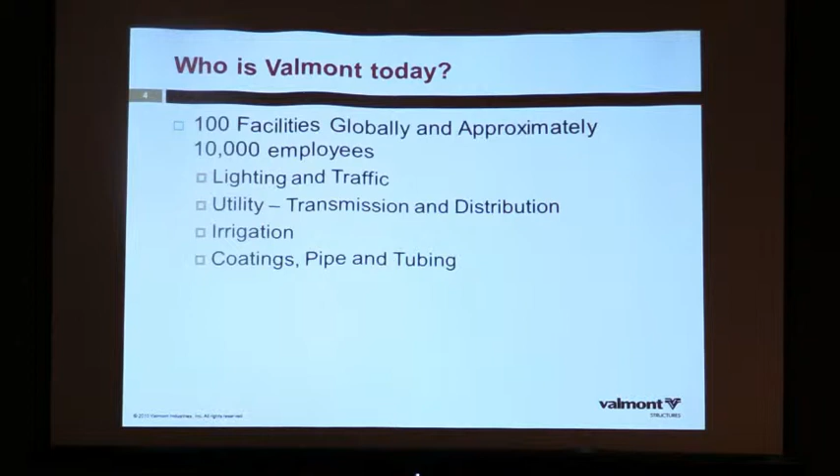Just a little bit about Zach and Steve's team. I'll introduce them specifically in a moment, but Valmont thinks of ourselves as a company of engineers. Whether it's in the lighting and traffic space, our application engineering, research and development, product development, or our machine builders business, we are engineers in every facet of the business. We're probably not as heavy per capita in engineers as you are in your businesses, but relative to our competitors, Valmont certainly is a leader with engineering aptitude.

A little bit of introduction about the two guys who will spend the most time talking today. Zach Thiemann, first of all, is a professional engineer. He manages the United States application engineering team. One of the guys who works for him is Steve. He's also got Barry Slottick, who you guys have worked with in the past, and Nizam Qasim, who handles another part of the territory. A little about Zach: he graduated from the University of Nebraska at Lincoln, did his postgraduate work at Iowa State, and is continuing his education today. He's been with Valmont 5 years in a number of different roles, always in a leadership capacity. Zach spent a lot of time in R&D where he led our FHWA breakaway, decorative base, and breakaway applications, doing a wonderful job with that several years ago. He spent some time in our communications businesses, monopoles, lattice towers and the like, and then most recently back in the lighting and traffic business.

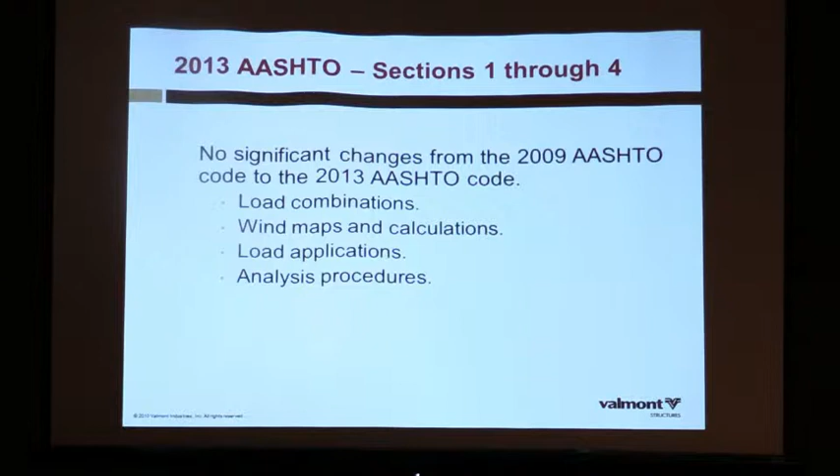We get right into section 5. Some of the background on AASHTO 2013, what I've learned reading through it and talking with others, is it was very much a research-based code. A lot of research out of Lehigh and Purdue, in regards to NCHRP reports, stuff they did in the lab, turned into stuff in the code.

So sometimes you'll see some effects from the code that might not, as designers, as people using it day to day, necessarily jive with what we see in the field.

What about the research that Karl Frank did down at Austin? Yeah, some of that went into it, but the two big reports were the two NCHRP reports, Rob Connor out of Purdue and Sougata Roy out of Lehigh. Dr. Frank was involved with that, but his wasn't as prominent. Was there some research in particular you're thinking of that got incorporated? They used his work. In particular, I know the Lehigh group used him as a consultant, and there was some back and forth, but the lead research was through Dr. Roy with Lehigh. Right, but they took his results, he did a lot of testing. Through the lab, through that NCHRP study there through Lehigh, that got incorporated into this research. Yep.

So kicking it off, one of the changes to the AASHTO code is they incorporated a minimum number of sides for tubes. Depending on your tube diameter, you had to have a minimum number of sides. Anything less than 13 inches, you had to have at least an 8-sided structure. Round is considered infinite, so it falls within any of this. What that was doing was really taking away your square poles, 6-sided poles, all the sharp bend radiuses that could have stress risers or will have stress risers and create concerns on the fatigue side. You can see they have a chart, and there's an equation in there also. So under 13 inches, 8 sides minimum. From 13 to 28, 12-sided minimum, and over 28, 16-sided minimum.

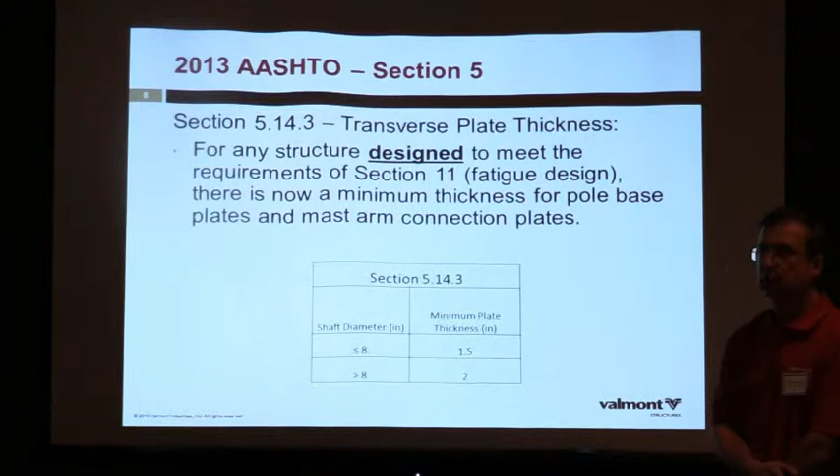So you said 5.14.2 pretty much eliminates square poles? If you're designing it to AASHTO, you're not going to be able to meet it according to how the code is laid out right now. Throughout this, if you look at the opportunities, if you've had issues or concerns, as engineers you can take an exception to something and work with it. But according to what they found in the research, they said they want to eliminate that in the AASHTO designs.

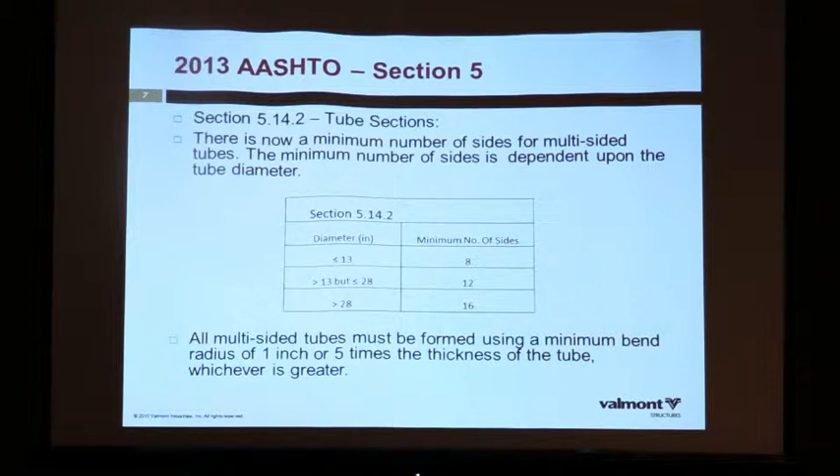Big thing I just want to reiterate again, the minimum base plate thickness is only for fatigue-designed structures. So your common light poles down the side of the roadway, 35, 40 feet tall, that doesn't require this minimum thickness because those are exempt from fatigue designs.

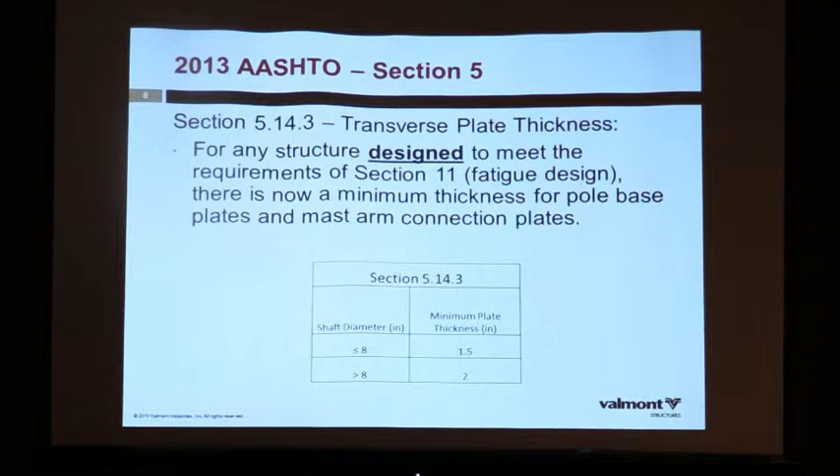Through the research, they also found that there can be issues with the welds, either a combination between welds on the top of the backup ring. Sometimes lower quality welds were placed in there because they were just using more seal welds to keep the galvanizing out. But the base plate shaft connection is your primary area for fatigue failures, so any sort of improper or lower quality weld could attract the stress in there, start creating a crack on top of the ring, and actually crack through the shaft.

So a combination of two things they did. One is they have new requirements for backing rings, when you do or don't place a weld at the top, and how you determine fatigue stresses.

The second thing they did was, depending on when you're welding it, how tall the backup ring could be. That's because of UT. When you try to UT and bounce a sound wave into the joint, if you have that weld at the top of the backup ring, sometimes the sound can go into the backup ring instead, and you won't be able to properly inspect your shaft to base plate weld. It bounces off the back of the shaft, but if it catches the weld, it goes into the backup ring. So they said if you're going to weld the backup ring, you have to do it after UT. If you're not going to weld it, you can't have a backup ring taller than 2 inches.

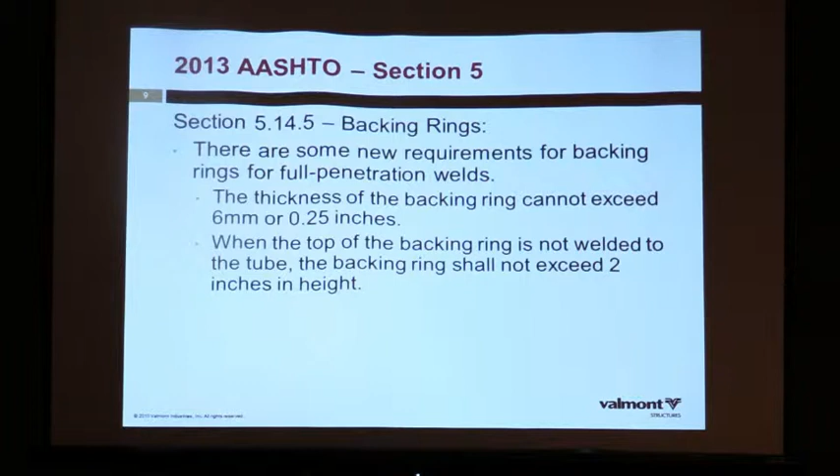Here's more of that information. When you are welding the backup ring to the top, you have minimum heights, and that's all based off the equation at the bottom, which tells us the minimum heights for your transducers to do UT, so you can get a proper inspection down on that joint. You want to make sure you have a quality weld down there, or else you're going to potentially create an issue for fatigue.

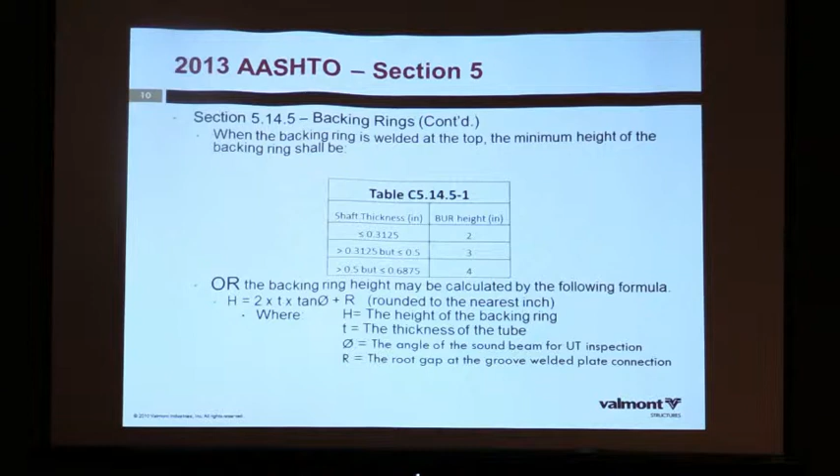So say you put a 4-inch hole, unreinforced, into a tube - round numbers - your pole shaft has to be a 10-inch diameter. If you go with anything less than 10, you would violate this portion of the code.

One of the things about this is that it's one of the areas for owner approval. Specifically called out in the code, these sections - the next 3 sections I'll talk about - with owner approval, you can deviate using sound engineering practices. But there is a requirement for 40% of the tube diameter.

They also dictated the corner radiuses, because the sharper the corners, the more stress concentration you pull into that corner, potentially creating an issue with cracking. So they say your corner radius has to be 30 to 50% of the width of the opening. If you want to round a corner, you don't really want square, sharp 90-degree angles.

The third thing they put in there was the distance from any transverse plate, like a base plate - how far from the base plate does the hole have to be at a minimum? They suggest 1 hole diameter. So if you have a cutout 6 inches up from the base plate on a 12-inch hole, you actually have to move that cutout to 12 inches of clear distance, from the bottom of the hole to the top of the base plate.

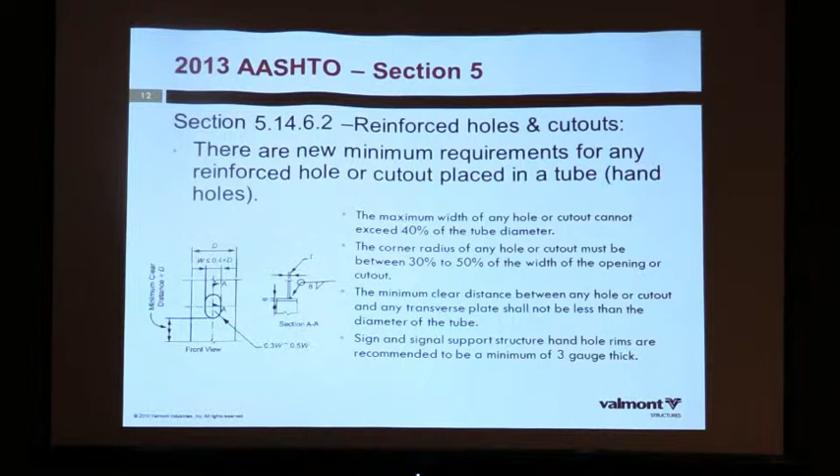And then the third thing is a suggestion. They suggest all rims on a sign and signal support structure be a minimum of 3 gauge, 0.23 inch. That's not realistic.

And they go into a little more detail on the high mast. So they usually call out this requirement for high mast. The first 3 bullets are all identical. The difference is the 4th bullet at the bottom. They suggest in this situation for high mast that they recommend a minimum of 1 inch thick rim. So it's a recommendation.

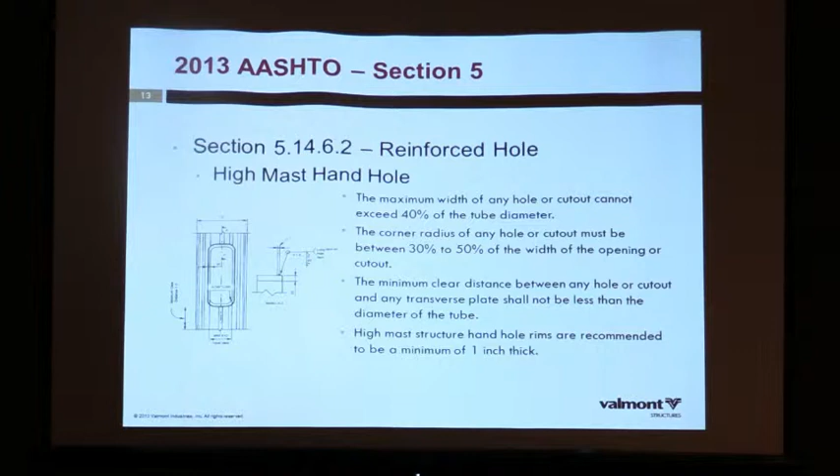But when Steve goes through his example, he'll show you the effect of this. Mainly we're seeing this first bullet, the 40% requirement, how that's affecting structures and at times dictating designs quite extensively. And one last thing for these 3 is this is specifically in the code - it allows owner approval, sound engineering practice to deviate from some of these requirements.

Moving on through section 5, they have the mast arm pole connection. Everybody is familiar with the wraparound gusseted or ring stiffened connection versus the old box with no ring stiffener on it. I think the next page gives a little bit of a view of it. Here you'll see the ring stiffened is this bottom one where you have the side gussets coming out.

There's actually a ring stiffener that wraps around the pole, and that's the new connection that was really developed after a lot of the issues prior to 2001 AASHTO in Wyoming. And the old connection is this top one where there was no ring stiffener - you had the side gussets, you had the front plate. This is to connect the mast arm to a pole shaft.

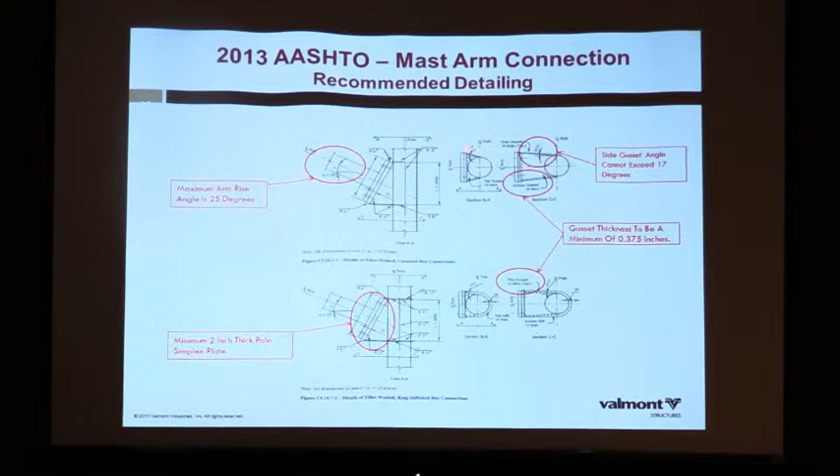So in the previous codes, they'd always provided benefit to the ring stiffened wraparound gusset style connections, that it was a higher fatigue resistance - you could put a little more stress into that and be within code. When they did all the testing in the laboratory, they found that they both had the same life cycles in the laboratory testing. So it goes against a little bit of what we'd seen in the industry that led into the 2001 code. So they say that both types are acceptable for mast arm to pole connections, and not jumping too far into chapter 11, they both have the same fatigue rating.

Infinite life, you don't have to design for fatigue. So you can have either of those and meet AASHTO 2013, whereas in 2009 or 2001, you would be limited in your stress if you use the non-wraparound setup.

Section 5.16, minor little change, but it's worth pointing out. The code says without owner approval, a washer should be placed between the mast arm flange and the flange plate on the pole, and that helps alleviate any sort of warping issues in that connection between those two plates, so you have a solid connection there.

I know that's something that in some states you can exclude. So some states have said we don't want that, and that's mainly because they've seen some issues where after fabrication, plates are a little more warped than you would have with an A6, so you have some fit-up issues. Good quality control would hopefully alleviate most of that, but putting a lot of weld onto a thicker plate like that, preheating it, will allow it to warp.

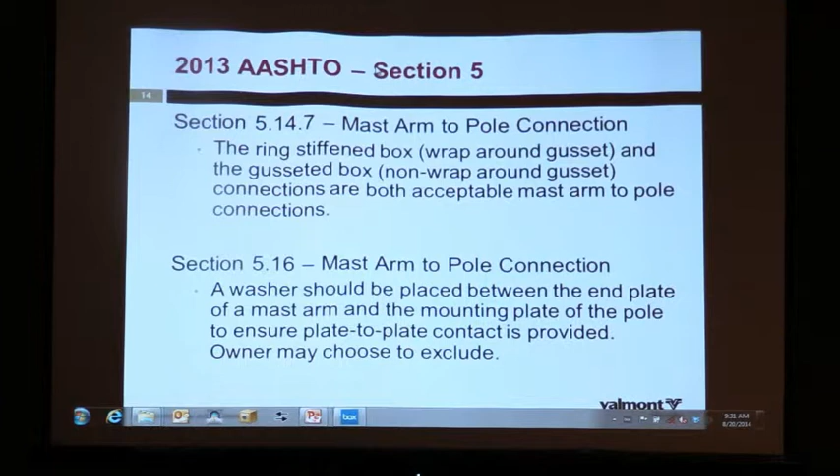It's going to want to pull open. The biggest thing we found, and I think most people who are welding do the same practice, is the preheat. Proper preheat throughout the process, getting that flange up to the proper temperature, will help alleviate that as much as possible. But putting stiffeners on there while you're welding will keep the deflection down.

But you still have that stress built up within it, so as soon as you cut it off or unbolt everything, it's still going to give some. Might not be as much, but it's not a fail-safe to not have any deflection.

But the work that's been done, like at the University of Texas, quite frankly shows that you don't really need stiffeners anymore. We haven't taken ours out yet because we just haven't had enough staff to work on that stuff. But isn't that where it's going? When we face this issue, you're going to get rid of the stiffeners.

You're talking the stiffeners from the pole shaft to the base plate? Yeah. We don't suggest using those to begin with, so we don't design stiffeners on ours. So the weld that you make, the simple weld down there, that doesn't cause any cupping, right?

It does. That's what this is about. Because if you put on 6 or 7 or 8 passes there on a thick plate, you will get that stress right in the middle. It will cause warping. That's without the proper preheat.

So that's without stiffeners, it's just this. Yeah, because we rarely put stiffeners on something designed to it. It's a full pen backup ring. There's a lot of weld in there to get that full penetration weld in there.

So it does heat up, like Zach said, a lot in that area. So by preheating the transverse plate, it kind of makes everything about the same temperature. So when it cools, it all cools together. And we do several passes, and those passes take a lot of care to do.

And we have dealt with a lot of plate warpage issues. We've taken that down substantially, and in a lot of states—California has done some amendments where they have really decreased that tolerance amount. We have been able to make that work with this process that Zach was talking about.

And what we've done is kind of given up—we still have the stiffeners out there, so until we take them out, we're stuck with that. We figured that's where most of the problems come from, and you're saying not necessarily.

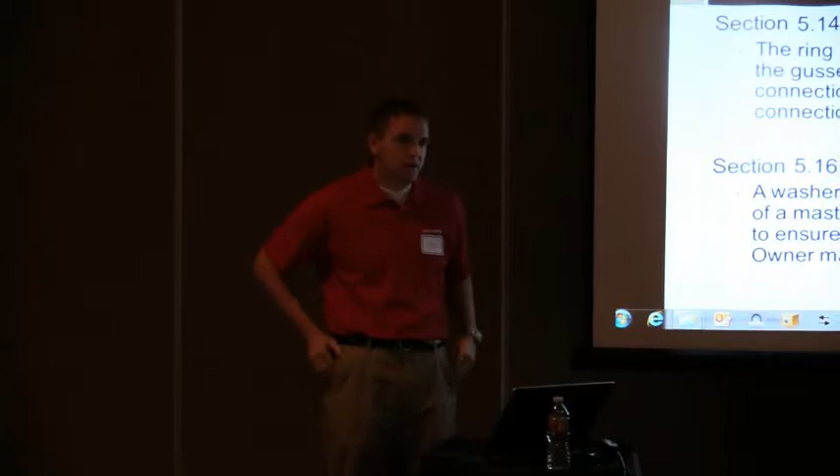So the thinner that flange plate is, the more it's going to potentially open up the opportunity for warpage. But thicker plates are going to help that out a lot too. Okay, proper preheat, proper reading is definitely it too.

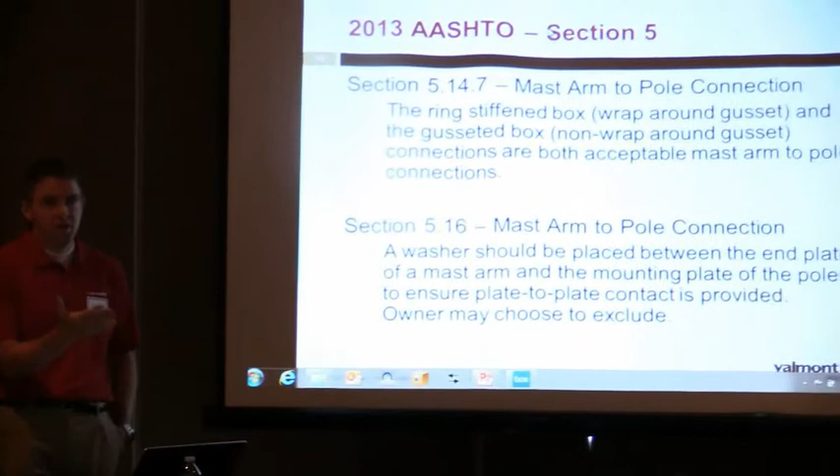And we don't want to put that in the code, because that's a big secret, how to get all that done. Well, we figure a lot of that should be coming from AWS. The suggestions and requirements in there follow through with proper control.

And for what's between the plate—yeah, and we create a gap. Yep, yes, and we don't want too much of it. And we can recommend you seal them. Yeah, we've suggested silicone.

We like to bring this up because we hear a lot of those concerns. We want that connection to be weather resistant, weather tight. We don't want water in there. We don't want exposed wires.

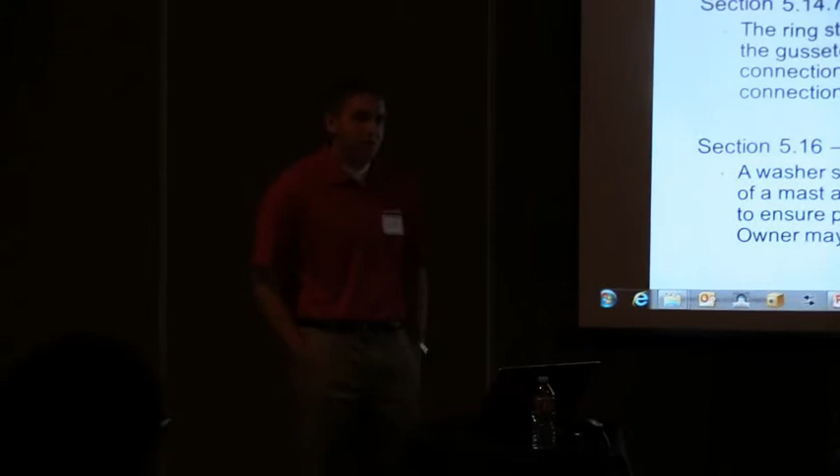And we totally understand, we've suggested some silicone in there. I think one time somebody went with a neoprene pad fabric in there to use as a gasket to close up that gap.

We're seeing more and more, as we bring this up, the entities are talking about it. That's one of the first things they'll say is, take that off. We don't want that to be part of our standard drawings or our order. And that's why we pointed out you can exclude it if that's not of interest.

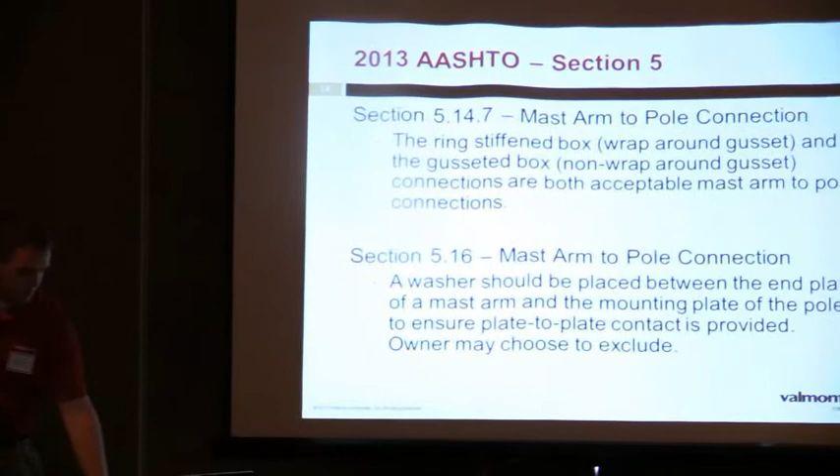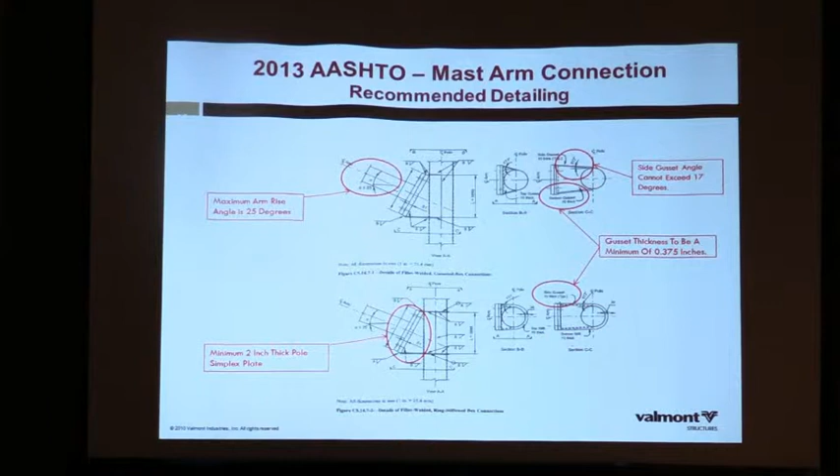This might be a bit of an eye challenge, but in this code they provided details for the wraparound gusset and for the box gusset. We'll try to highlight some of the main areas of changes.

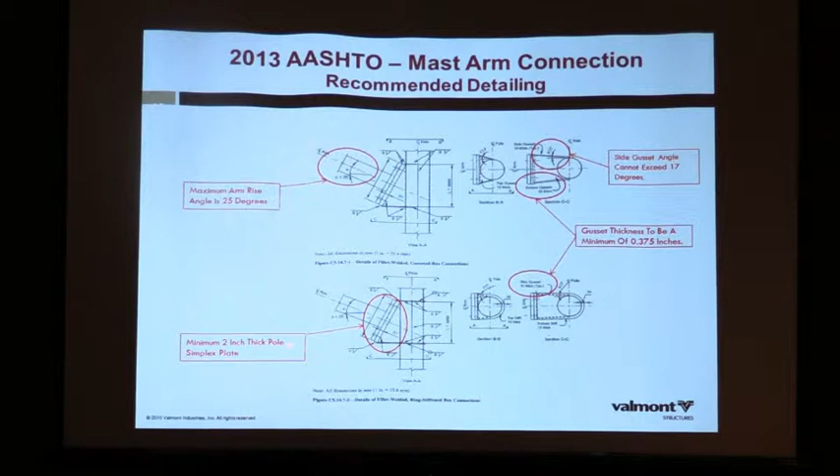One change is pulling out the 2-inch thick base bolt flange plate, on the mast arm side and also on the pole side—they call them side gussets. Typical thickness is 3/8 inch, or metric 10 millimeter.

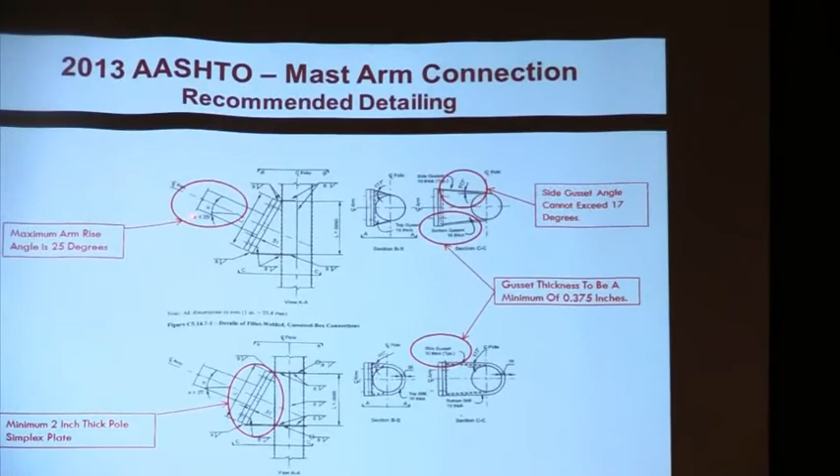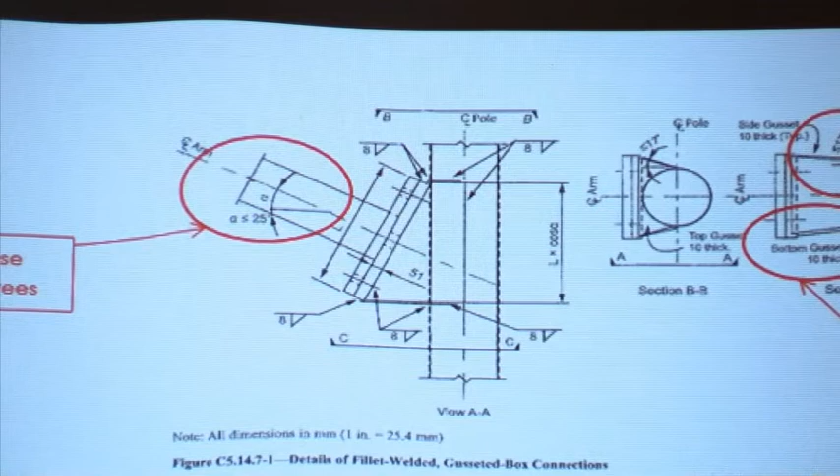Side gussets, they suggest not having it angle out more than 17 degrees. And they call out that the mast arm can't exceed an angle of 25 degrees in their recommendation, which gives quite a bit of rise. But remember, this is a testing code—a lot of what they did is based on what they tested.

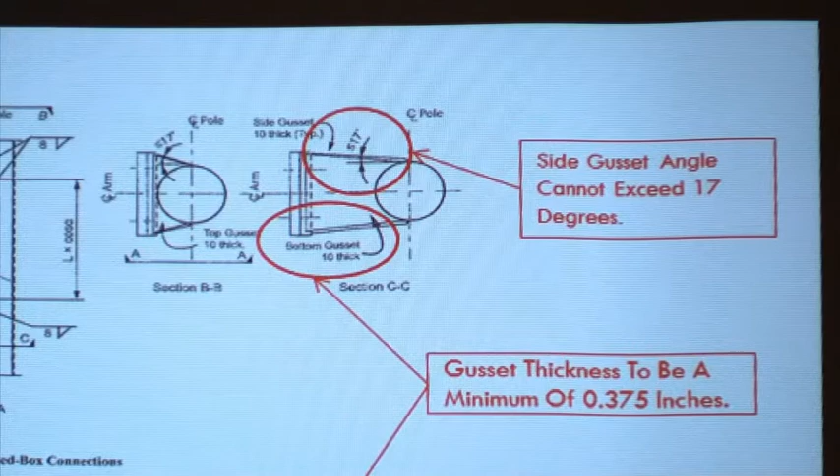They're doing a little more research, or discussing it further, particularly on the hand-hole issue, since it's been brought up more in previous meetings and by end users—that 40% rule is really dictating a lot. Steve will show you that later. So they're looking at getting more funding for research to try to expand from 40% up to maybe 60% of your shaft diameter, since sometimes that criteria is quite large.

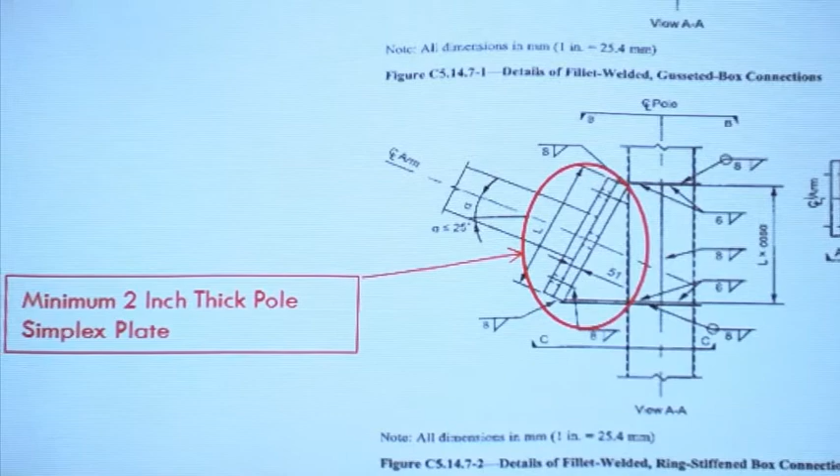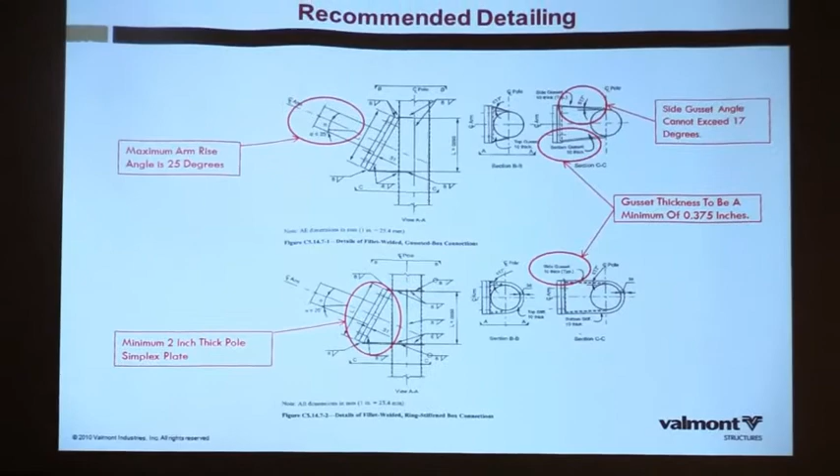Some of the welds they call out on a thinner shaft require 3 or 4 passes on a 7-gauge shaft, which is a lot of welds. So we use a different concept—we could use any one of those shown there, but we haven't, because that's not where we went.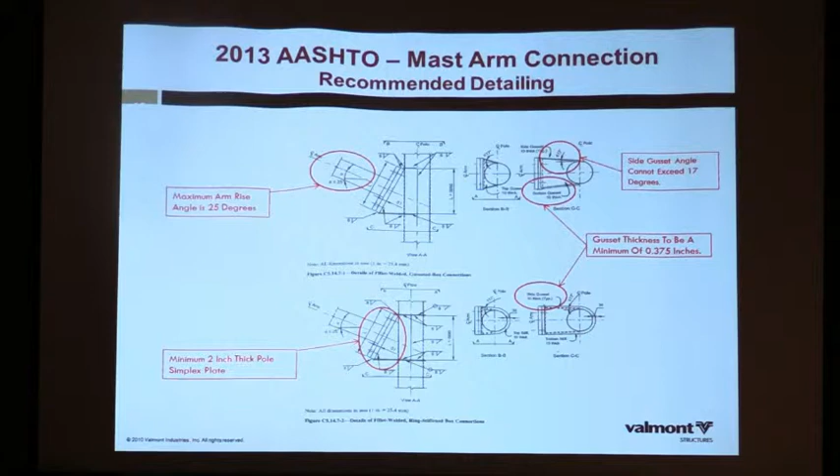Carl and Michelle objected because it caused out-of-line fabrication for you guys, but you've been building a lot of our signals, and you no longer have out-of-line fabrication—you rearranged your plan to do it. But I think that's a key element. I talked to Roy, or Segota Roy, and he saw that too. So just a comment, those work really great—anything works better if it's on the inside as opposed to the base.

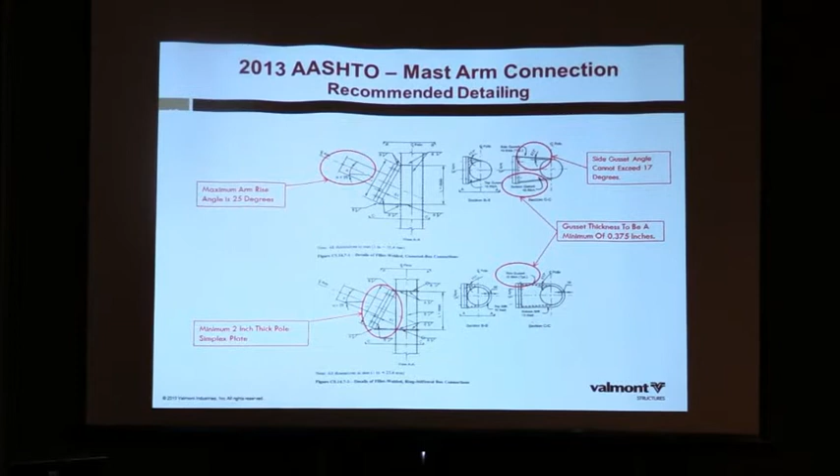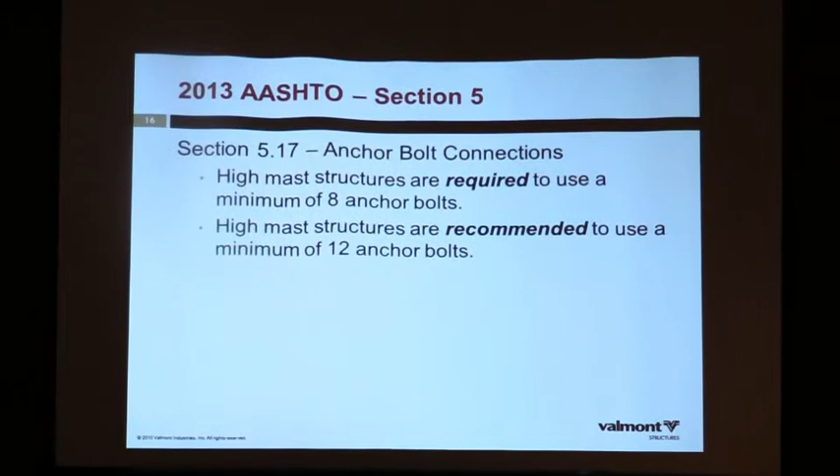An additional new addition to this code is the anchor bolt connections. High masts are required to have 8 anchor bolts—in the past you could have 4. They had recommendations of 8, now it says required to have 8 anchor bolts on a high mast structure. They recommend 12, but we're required 8.

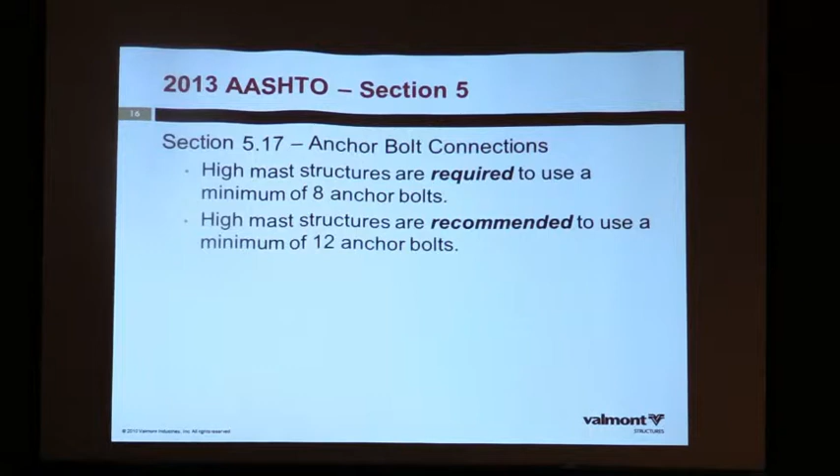Sorry, I missed it—what's the definition behind that structure? High mast structure is, they call it out in Chapter 11 in particular, a structure over 55 feet, primarily used for lighting purposes. Over 55 feet, so stuff along your interstates more, not so much what you see in residential areas.

The reason I'm asking, we have these 65-footers, so what do we call a mid mast, versus the high mast? Through the code, there is no distinction—I mean, anything under 55 is typically called low level rather than high mast lighting. Because we've got our new lowering device standard that we created for video cameras, and we've got 50s, 60s, and 70s, and that's kind of a gray area. If you consider that high mast lighting, because it's a camera, that's something to work out with the end user on how you want to consider that structure.

Yeah, and I guess the concern for our signal in general is just the vibration—flash vibration—so you can still see it well. Exactly.

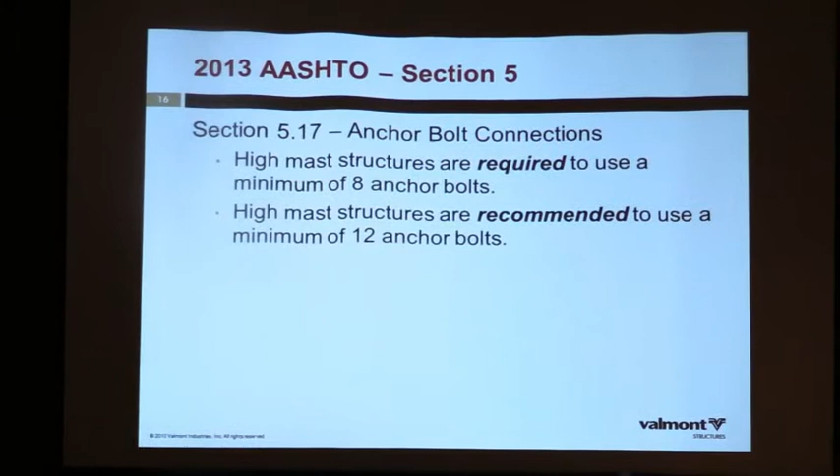Part of what I'm trying to figure out is whether there's a big difference - I've used some 60s before, and now I've got some 70s. Is there some big difference, or is it just a little bit bigger? It's just a little bigger. Is it talking about how the code would impact fabrication? The fabrication side is going to be bigger, so running the fabrication is not going to be too much of an issue. There's no fundamental difference in terms of what you do with it - it would be based on your section properties for deflection, your code stuff.

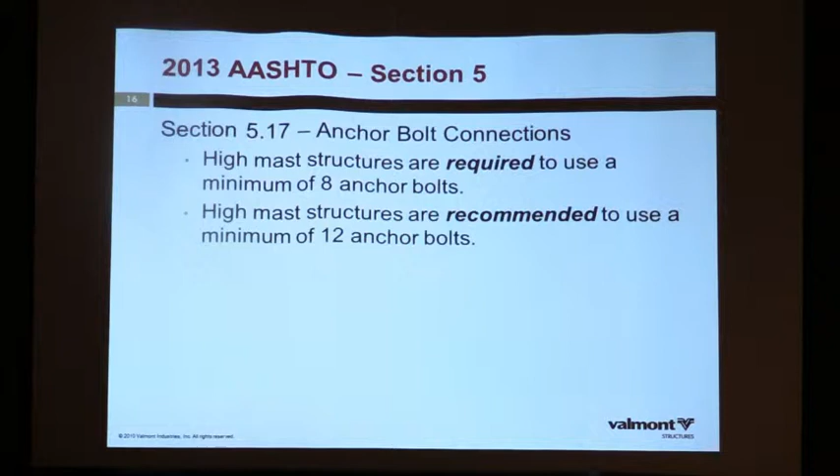By the way, how are they vibrating? Are you able to see the ones you built? I've heard no complaints yet. We don't have too many up yet, but I've heard no complaints. I was trying to watch one on top of Floyd Hill on a luminaire, trying to see what a VMS said a few hundred feet away, and I just gave up because it was a windy day, and I couldn't even read it.

So do you think the deflection criteria is right or wrong in the code right now? I don't know. We'll see as we have to. The code actually doesn't have a camera deflection criteria, so it's usually user-based. What is it you guys spec out? Usually 30. I know our operations guy said, oh, it's a 70-footer, we need to still see the camera. And I'm like, it should have been done with some kind of deflection control in the design, so I think it won't be a problem, but I don't know.

We put some on variable message signs, and they only go about 5 feet above the variable message sign. Operations or maintenance guys don't like that, they get dirty, so we've now got a design that goes up 15 feet. And I asked, well, how's the deflection compare? Oh, it's still less than an inch. I was like, well, an inch at 15 feet, that's quite a deflection. I don't know what kind of limitation it was referring to, but...

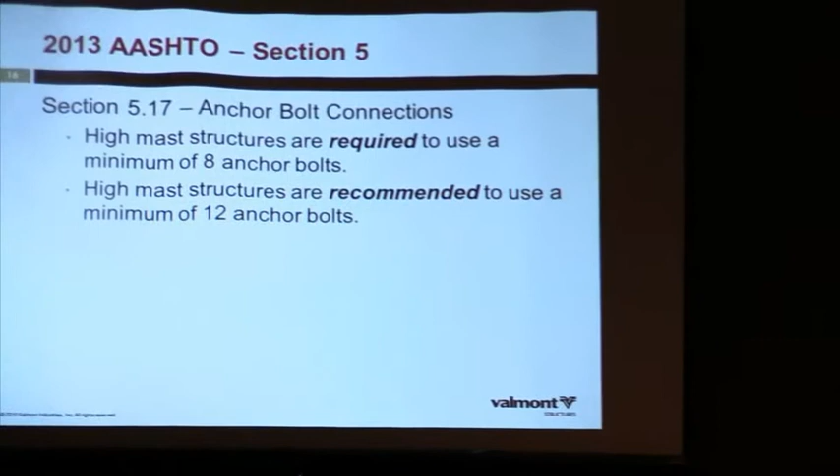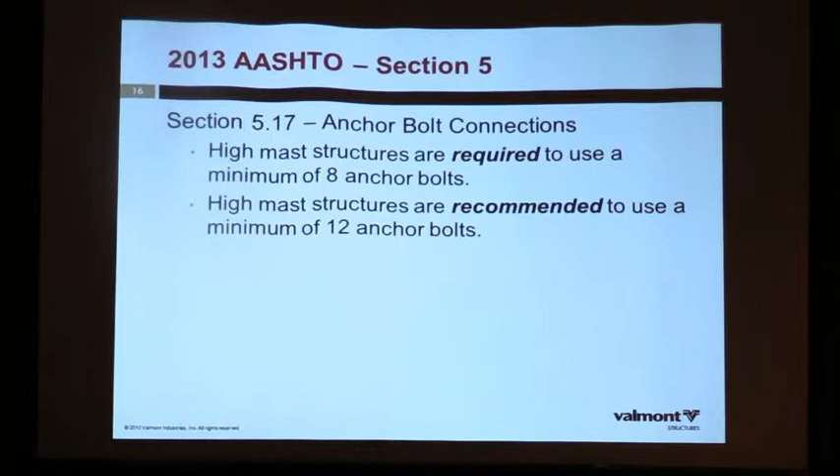So I guess we're still learning. Bottom line is we're still learning. Got that button, didn't you create it? No. All right, okay, so jury's out, we're still working.

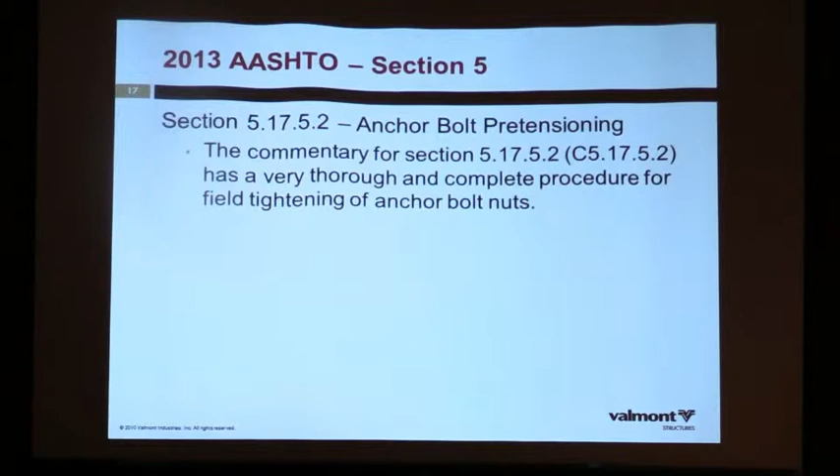Under the anchor bolt section, they've added an anchor bolt pretension suggested procedure, so we get a lot of questions on how do you deal with that - we're asking for advice. When you look at the history of fatigue, anchor bolts being loose is a huge issue with potential fatigue, starting to rock and everything else. So they provided this in the commentary, an 8-step procedure that we provided out to maintenance or anybody doing installation. Here's a suggestion that they have - how do you go through the turn-of-nut method?

I'll throw it in now - is there any question right now just on section 5? We'll go into the fatigue portion next. We've been talking about camera deflection - is there other states or somewhere else that has a spec that could be used so that we don't have to guess? To my knowledge, and Steve would know this a little better, I don't think there is another state that has a standard like that in their spec.

But we see most commonly 1 inch at 30 miles an hour in several different cases. We don't really see anything that's standard, but when a certain state or city entity may purchase a certain camera type, usually there are specs that go along with that telling us what that is. Certain states have adopted - one state has 0.7 inches at 30, 0.8 inches at 35, and 1.4 inches at 70. So I usually have to do 3 different checks, and our program does follow the Petrie method for round tapered poles to check stress, doing these 3 different checks. So it's kind of variable between different states and the type of equipment being used, either camera or other type of control boxes and other things that may be attached onto those poles.

We'll move on. Keep discussing, keep talking. I think it's great. Section 6 is the aluminum section.

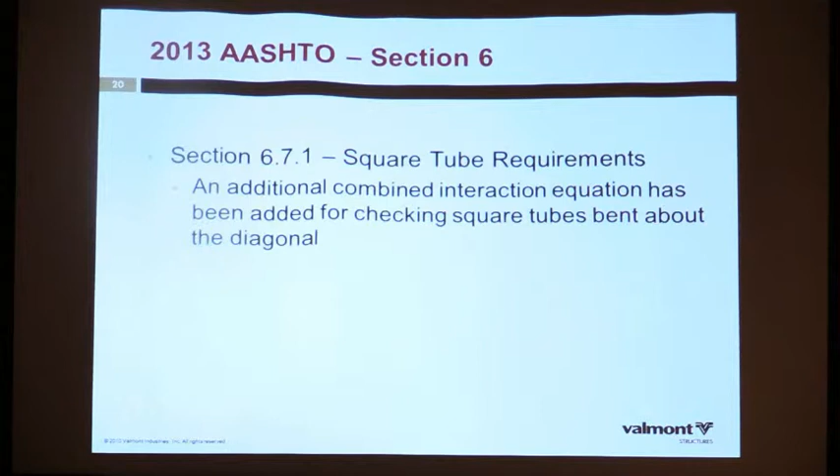Steve and I do steel pole design for Valmont. I talked to our aluminum group up in Farmington. Their biggest takeaway was the addition of a combined interaction equation for a square aluminum pole. Previously, there wasn't direct wording saying the square aluminum pole should be checked across the diagonals, and that's been an issue because you typically find a limiting direction for your capacity check. So that's something that needs to be checked, and the code specifically discusses that.

Sections 7 through 10, nothing real pertinent. We looked at the concrete, composite, and wood pole sections, but coming from the steel and aluminum side, we didn't dig as much into that. And serviceability, which is section 10, there really are no significant changes that we saw.

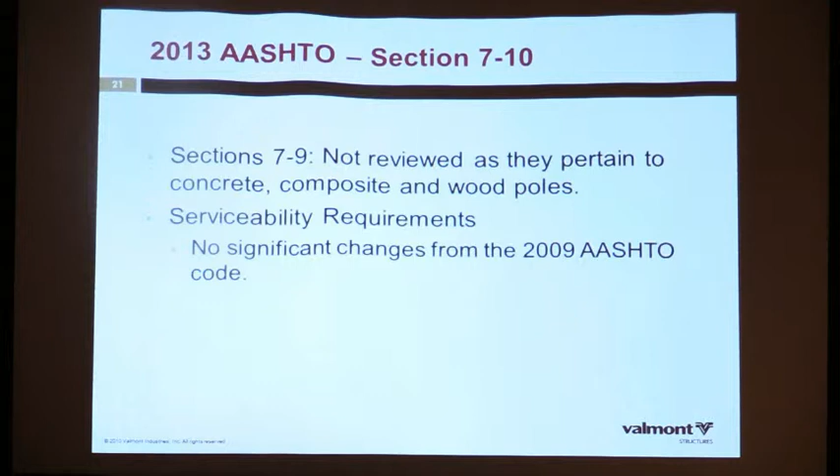The big difference, other than chapter 5, is section 11. That's the fatigue section, a lot of words, so I'll try to summarize. In the past, the whole fatigue section applied evenly to all different types of structures. You didn't really differentiate much other than importance factors between a high mast and a traffic structure. You might take out galloping, or vortex shedding, but the vortex shedding check was the same for all structures.

This code has separated high mast from traffic. So you have a few sections that tell you how to do your traffic checks, your sign and signal support checks, and then another couple sections that tell you how to do your high mast checks. Different wind maps too.

In the past, there were 3 fatigue categories: 1, 2, and 3. That's still the same for sign and signal support, but for high mast, there are only 2 now. There's fatigue category 1 and fatigue category 2. There is no more fatigue category 3.

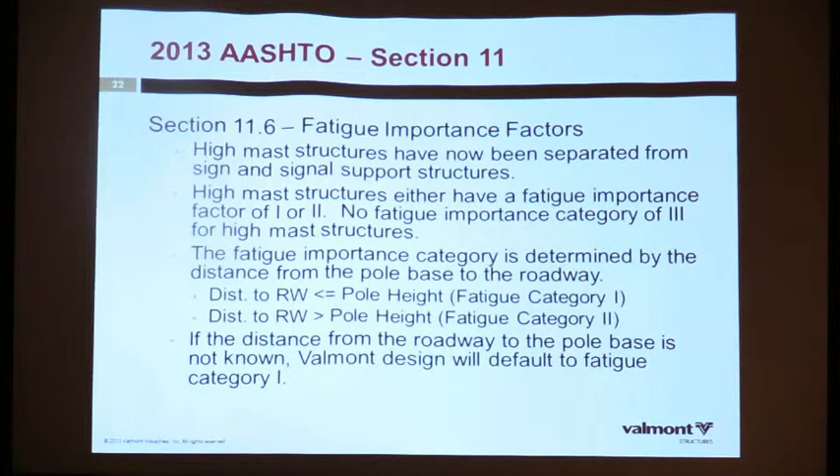So how do you define fatigue category 1 and 2 for high mast? It depends on the pole height and the distance from the roadway. Really, it comes down to: if the pole were to fail, would it land on the roadway, or would it land in the field and not affect day-to-day traffic flow? So if the distance to the roadway is less than or equal to the pole height, it's fatigue category 1. If the distance to the roadway is greater than the pole height, it's fatigue category 2.

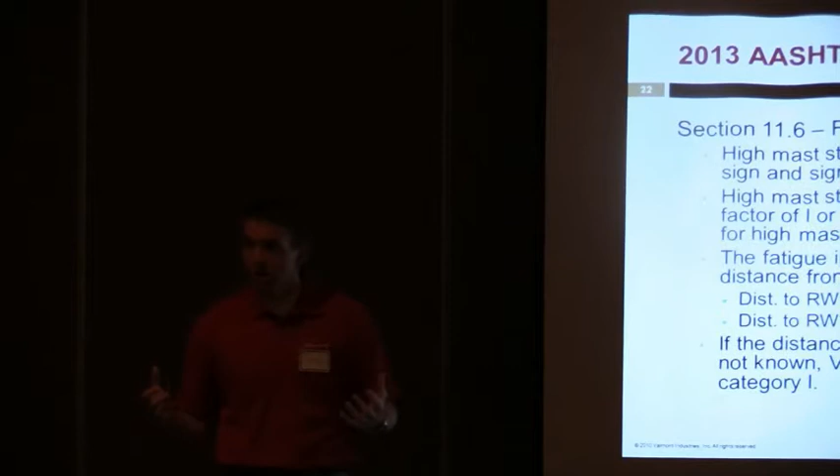If the distance from the roadway to the pole base is not known, we're going to go with fatigue category 1. We want to be on the safe side, but we figured those situations are going to be at intersections, in interchanges, things like that, with a high likelihood you'll be close to the roadway.

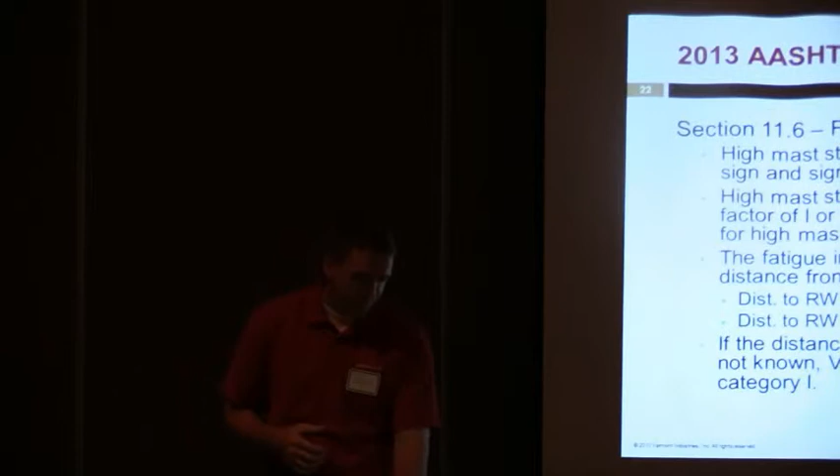Like I said, they pulled the high mast lighting towers out from the traffic side, so they've actually provided a wind map in the fatigue section. It depends on where you are in the country, and that determines the high mast lighting pressure you put on your high mast structure.

In the past, your natural wind gust was 5.2 psf times your importance factor. Now, depending on the fatigue category and section, it can be anywhere from 5.8 psf upwards of 7.2 psf. So you're increasing the pressure on the high mast lighting.

They've taken away vortex shedding as a separate check. They figured vortex shedding and natural wind gust are really acting at the same time, so you can't differentiate the two. I'll try to talk louder, I guess they're having a party next door. So they made it literally one check for your high mast lighting.

In Colorado, you'll see a better picture later in the presentation—should have put it here. You see it's split across two different sections, A and B.

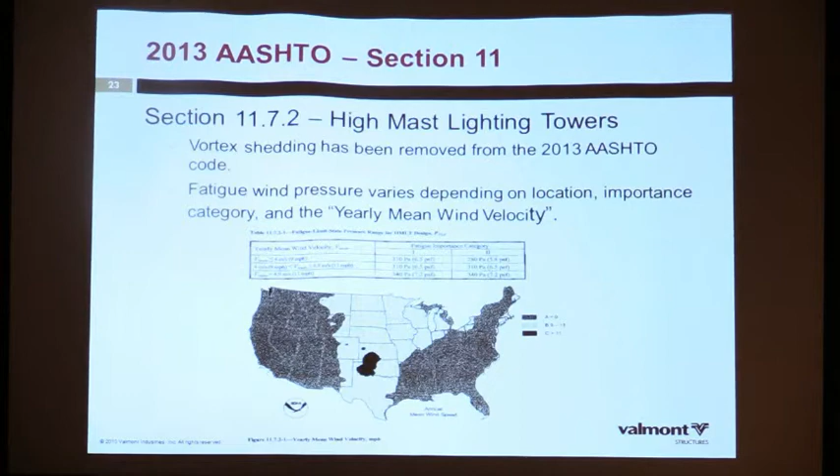When you look at it, the big difference between A and B is: if you have a fatigue category 1, across the state it's the same wind pressure. The only difference in wind pressure is for fatigue category 2. So if the pole is farther from the roadway, you might have a lower wind pressure if you're on the western side of the state versus the eastern side.

What's the little special black area there? Tornado Alley—that's the highest wind pressure, right through the panhandle of Oklahoma, southern Kansas, more into Kansas, right through there. That's 7.2 psf. So the old check was 5.2, now it's 7.2.

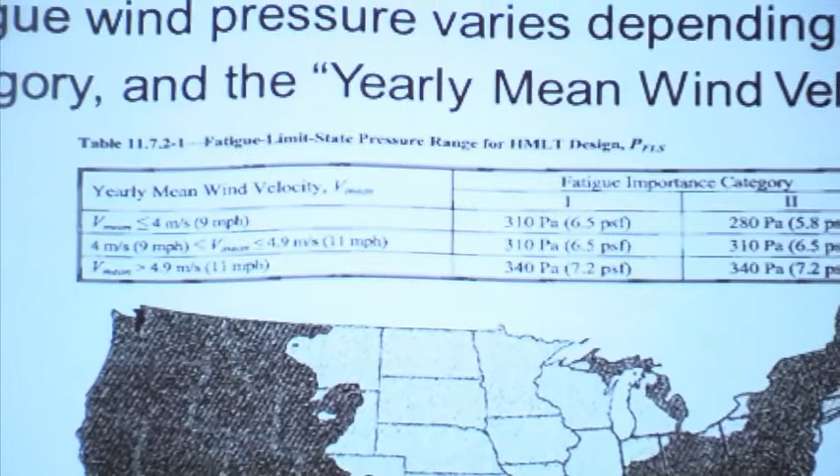The lowest wind speeds are out here, the highest wind speeds in the middle. And as you look at fatigue and wind flow, open plain, you're going to have the most.

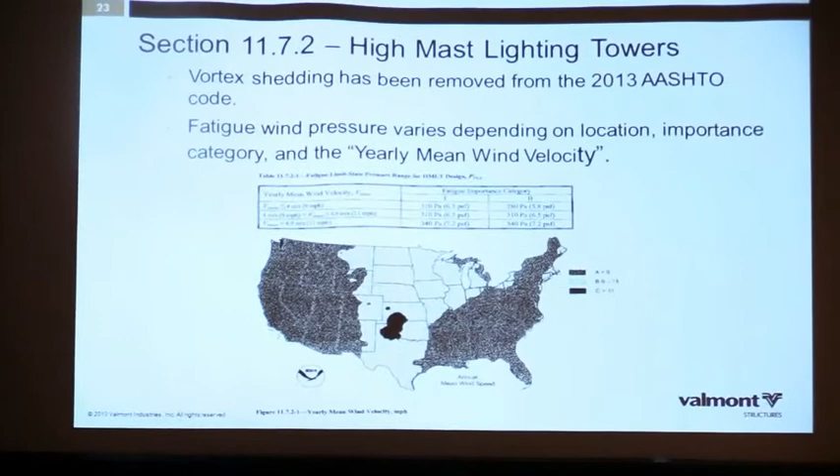What's the source of this? Where do we get this from? Where do you get the map? I've seen different wind maps before, but this one is out of NOAA. NOAA has a yearly mean wind velocity. This came out of one of the NCHRP studies through Purdue. Purdue did a lot of the fatigue, the high mast side of it, and this was in their report. I found back the section as a reference, I found the map. It had about 20 pages of, by different cities in different states, what the average wind velocity is for a whole year. And that's where this is coming from, and from there, the pressures.

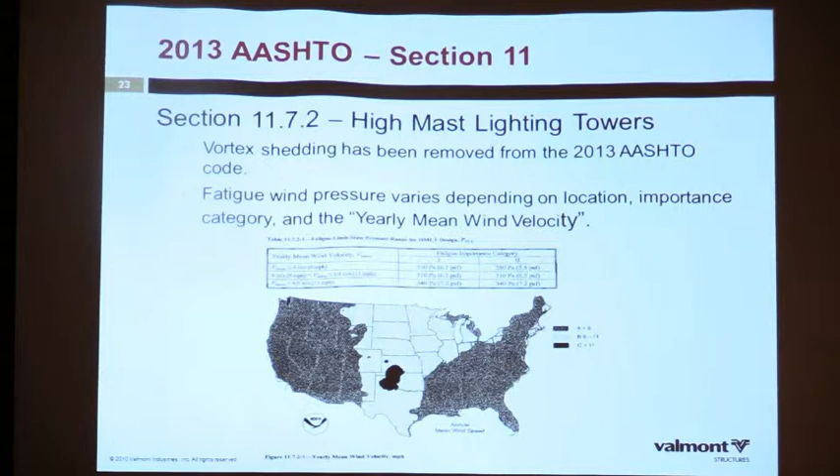One thing that's interesting, we're in Colorado so it doesn't affect you guys, but they forgot Alaska and Hawaii. We helped AASHTO determine provisions for Alaska and Hawaii that you don't see on here, and there's A, B and C ranges for those two areas too. We did a little research with them on that, and you got it approved in June. So next revision, you'll see Alaska and Hawaii. We're back to 50 states again.

Okay, so I've got a project that's got like 70 footers on it. I don't know whether you guys are gonna get the contract or not, but if you do, it'll say the pole thickness and whatnot, and it's got a whole design spelled out. Can you check that on the 2013 code and tell me what difference it would make? That's really easy for you to do. Yeah, Steve does that a lot. That's what we're going to do, is help everybody understand the changes.

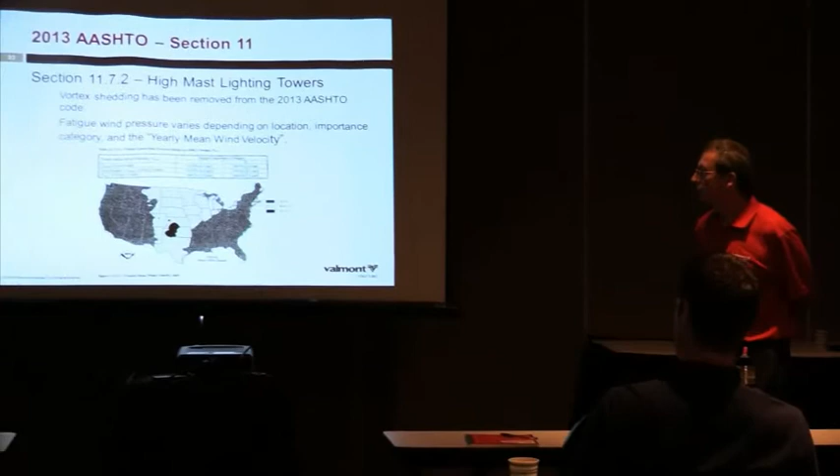And we don't have those, of course, because you always run the presentation. We grab some, and this is kind of stuff we can provide to you, you can decide what to do with it. Yeah, that's not a problem. I'll talk briefly about that because I have one of our examples that we're going to show to you. That's a camera.

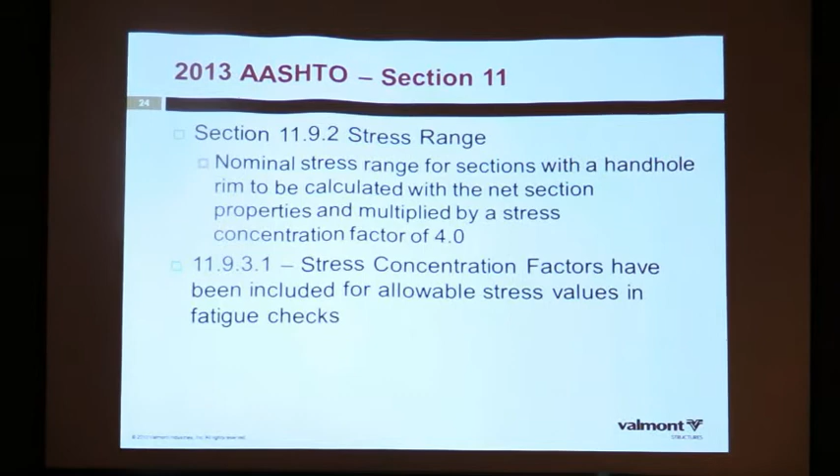One of the other changes they made was related to handhole rims. In the previous code, you checked the handhole rim on the fatigue section on the gross properties, making sure you stayed under a certain allowable stress. In this check, they've actually changed the handhole rim check and instituted a stress amplification factor. So when you put a handhole rim in a structure, you have to check that cross section, the center of the handhole rim, for the net section. After you cut the hole and put the rim in, find your section modulus, figure out what stress you have, then multiply that by 4 and make sure that number is under 16 KSI. So really your net section stress has to stay under 4 KSI to take the amplification factor out. At times, that's another area that's controlling the design.

So we jump into the base connection. You can get base connections higher than 4.5 — we've seen in the past upwards of 10 KSI allowable stress. So a rim 18 inches or 2 feet up at 4 KSI is going to limit the overall design of that structure. So you'll see in the analysis there should be more pages, more checks, because of this additional detail they put in there. And again, the stress concentration factors have been included throughout the whole fatigue design.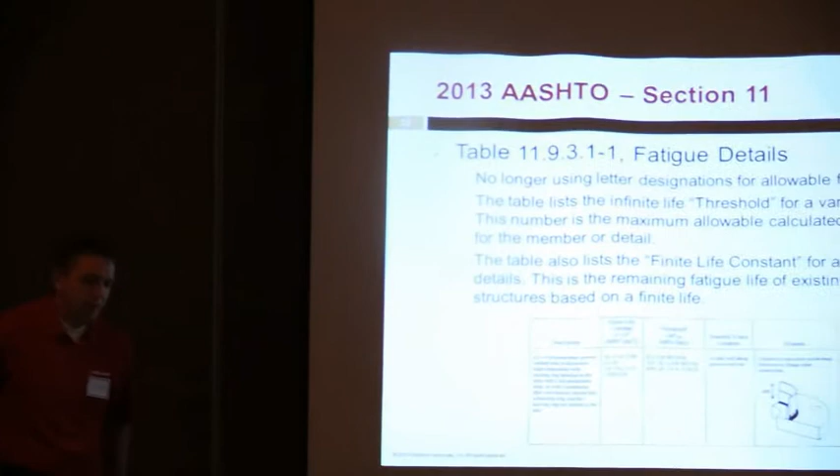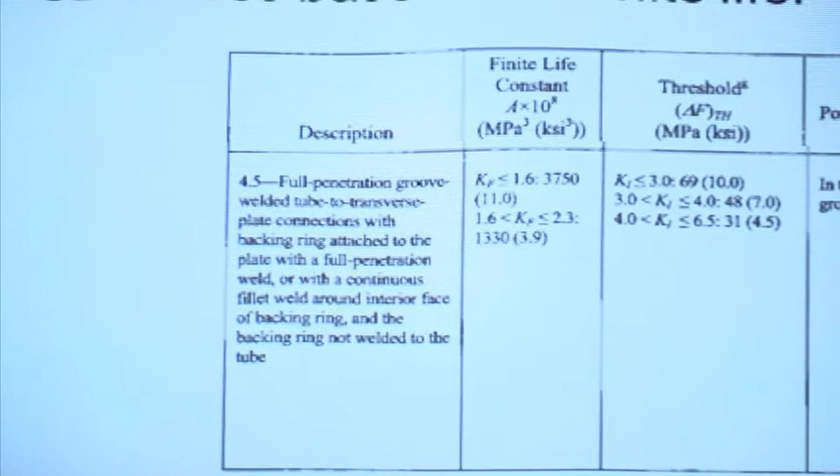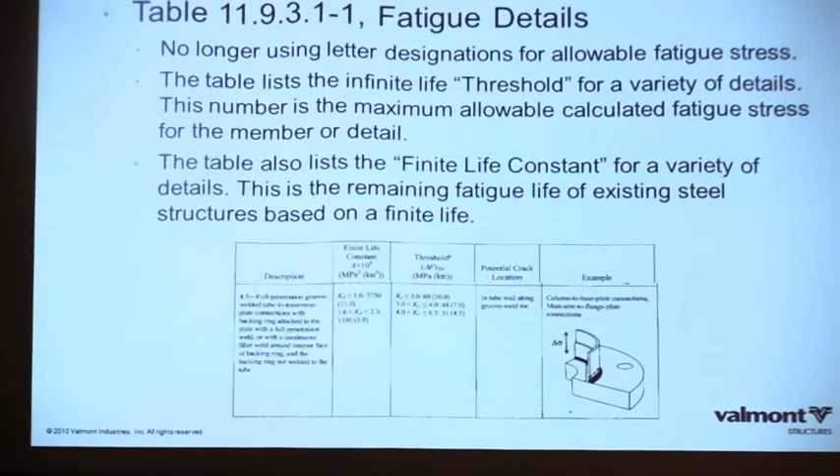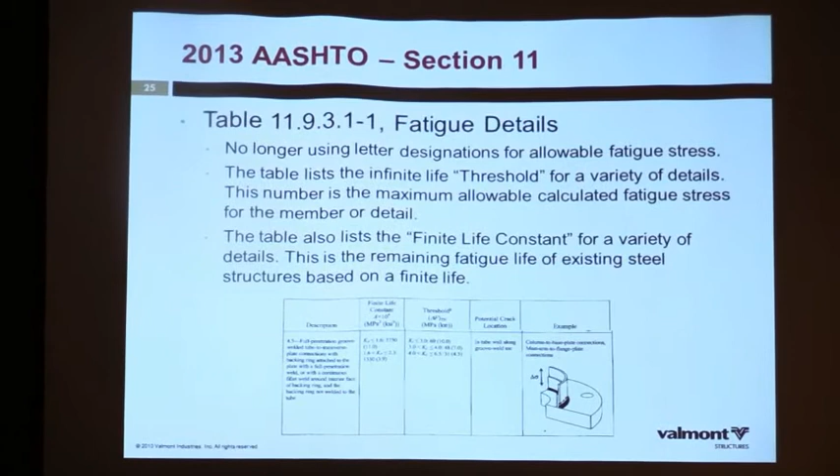Just something to highlight — there are no more letter designations. 2001 and 2009 had the A, B, E, E prime, D classifications for allowable stress. After 2013, it's not across the board that a connection gets an E; it all depends on the actual joint configuration. They have thresholds and a finite life constant. At the bottom here is one of the standard connections to the backup ring, and depending on this factor they call KF, the finite life constant, depending on what number kicks out of that equation, depends on your allowable stress. You can find out a connection is no good for fatigue, that you can't put any stress into it, or you'll find it's 4.5 KSI, 7 KSI, or upwards of 10 KSI allowable stress for a backup ring connection that we've been seeing and using for the last 12, 14 years.

So the same size detailing, just depending on how big the center hole is, how big the shaft is, things like that, can have a varying allowable stress depending on this requirement.

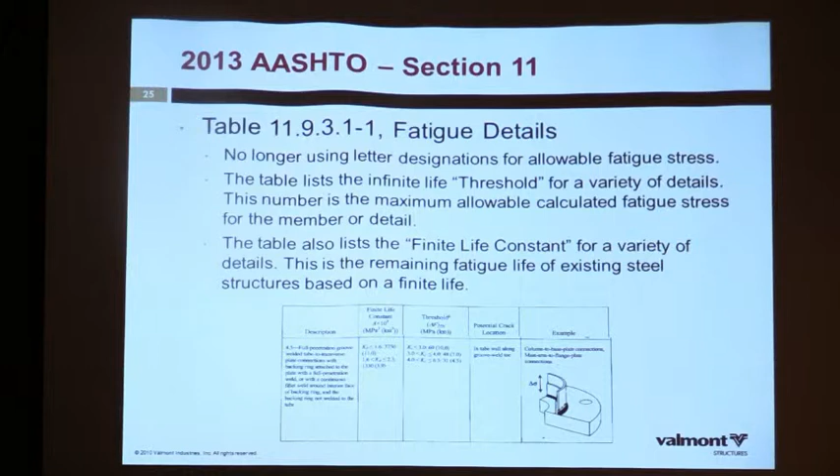What was the advantage of dropping the letter? The reason is, I think it's because they didn't want that one-size-fits-all approach. We found that if you have a really thick shaft, thinner base plate, and a pretty large center hole opening, the actual stress and life of that structure, with fatigue research, will fail quicker than if you had a thicker base plate for that setup where your center hole was smaller. It's going to make that base plate stiffer and the bottom of the shaft stiffer, and it's going to give you more life. So they're incorporating that whole joint configuration and giving benefits to having a more rigid, more stiff structure and giving you higher life.

It's definitely a lot more involved in the design.

Kevin, that's a relatively small hole in the base plate. And then we get the shops that have this big hole, and they tell us, oh, we can't do that small hole. I forget whether that's the monotubes or the... Well, I haven't checked shop drawings in a while. Checked some lately? No, you're talking side structures, right? It might be, yeah, side structures. Marked it up, but that's not the standard. It says, oh sorry, we can't. Well, we've been sticking to it on our end. I don't know what's going on with your end there, but we've been sticking to it.

We actually developed a method for checking that handhole area. We did a little bit of finite element work, and then we turned it into a closed form solution. We checked that, and we used that as our guide.

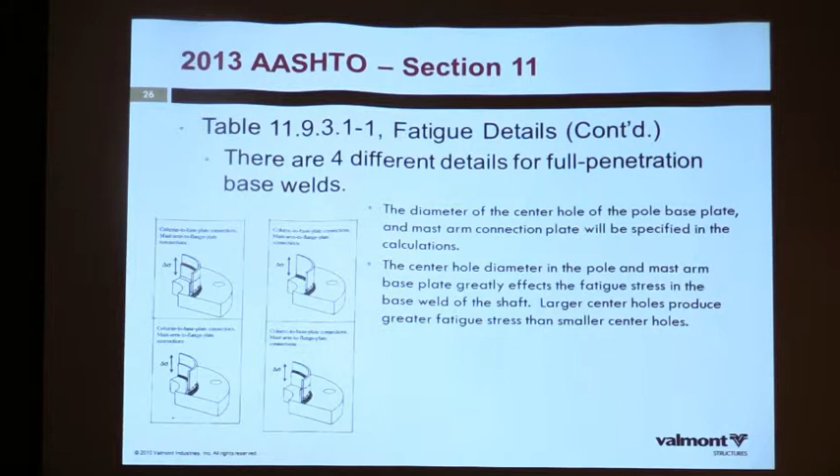Talked about this earlier, the wraparound gusset versus non-wraparound is infinite life. They say you don't need to check it for fatigue, as long as you're following the recommended detailing in the previous chapters or other detailing with sound engineering practice behind it. If you put that on the end section, not the base section, there's no stress to compute. This is like the end section, and it slips over a base section, and I weld to that.

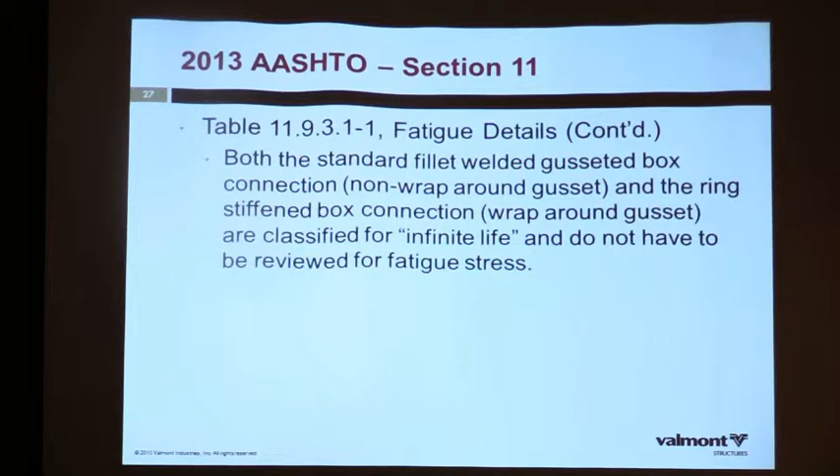I think my understanding of the issues from Wyoming was you would have cracking at the edge of the gussets, which you would still have the stress there. But it'd be interesting to see, because that would be a great way to solve the problem. If this slips onto something, and you're welding right here, and you compute the stress here, there isn't any on the end section. There's a stress on the base section, because this is a slip connection with a moment in it. But we get rid of that stress right there.

That's the trick. We'll talk some more after. I'm interested in that, I haven't heard that before, so I'd like to see more.

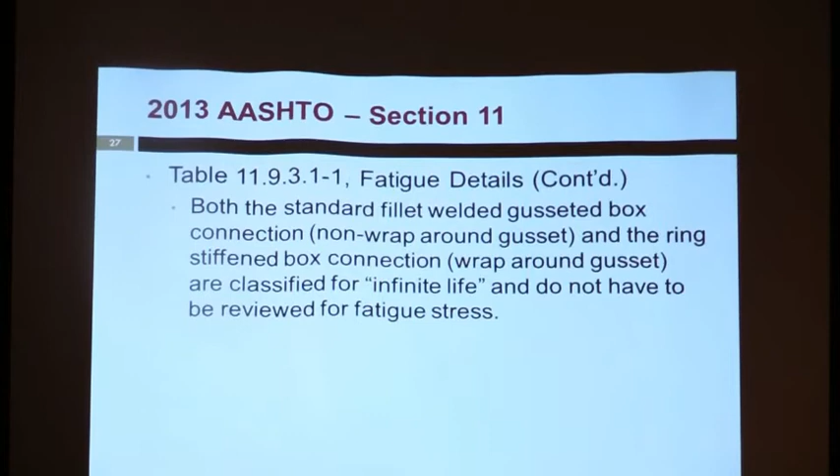Trying to think back, I think it was last September and October. I think it was lowering device poles, and I think it was Valmont. I don't know, I was on vacation, I came back. Anyways, about that, what we show versus what they said they could do.

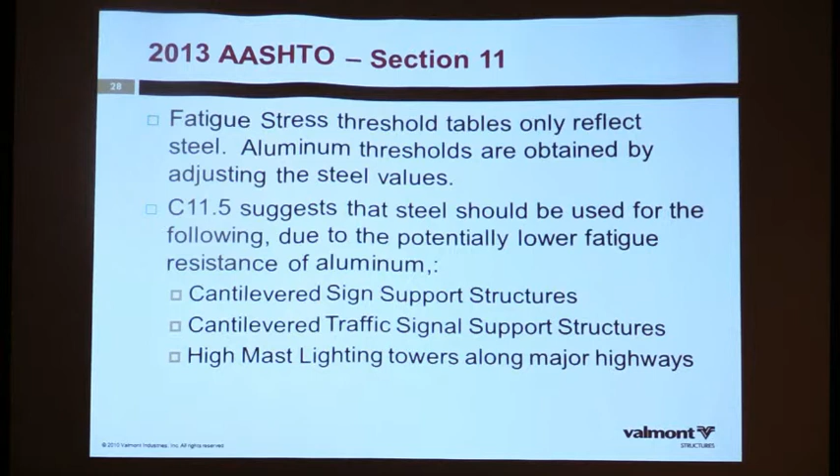Real quick, this section 11 talks about all the tables in there being set up for steel. There isn't a separate set of tables saying these are your stress ranges for aluminum. It actually just gives you a constant divided by about 2.6, so a much lower threshold than steel. For large structures, aluminum really is going to get quite large for fatigue, same as we've seen in past codes. They put in the commentary, highly suggesting using steel for situations with fatigue, just for sizing purposes.

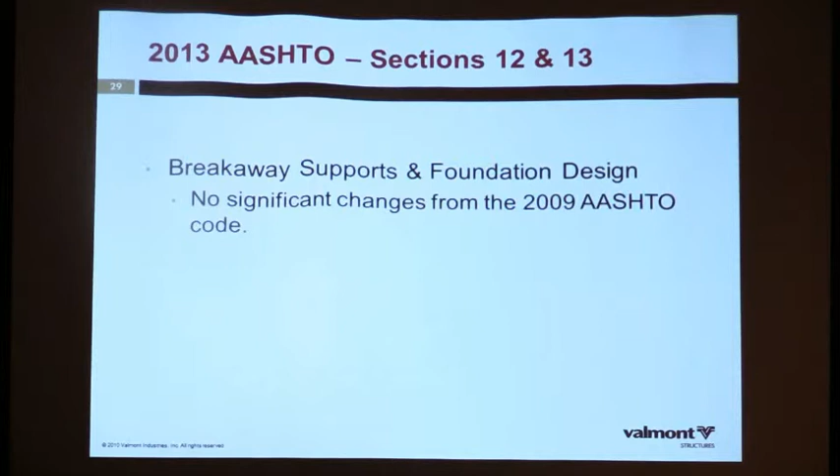Chapters 12 and 13, no significant changes. That's your breakaway supports, foundation design. Those really focus on the provisions, so nothing really to report there.

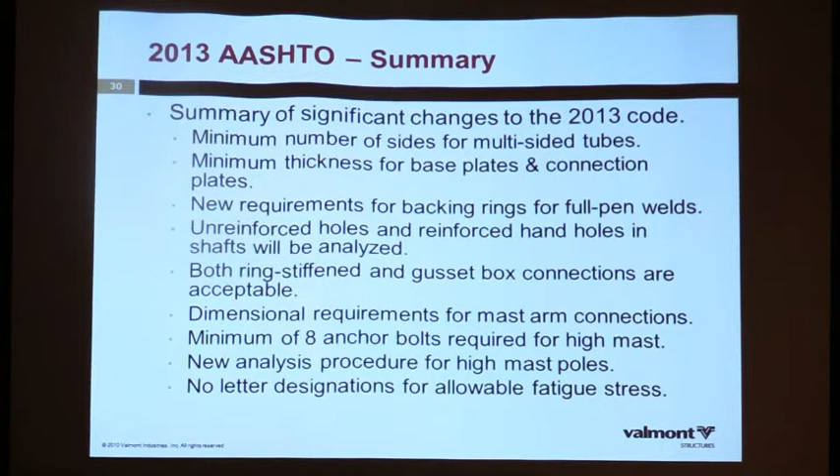Quick summary, I think we've hit it quite well. Minimum number of sides, minimum thickness of base plates and connection plates if you're designing for fatigue, new requirements for the backing rings, requirements for unreinforced and reinforced holes. The ring-stiffened and gusseted box connections are both acceptable. You have the mast arm connection dimension requirements, minimum of 8 anchor bolts per high mast, the overall new fatigue procedures for a high mast structure, and the no letter designation. Those are the big keys to remember through this.

So the last bit before we move on and take a break is I just wanted to highlight and walk through the different areas they allow owner approval, the areas where with sound engineering practice you can deviate from what the code shows, and it's perfectly acceptable. We talked about 5 of them in particular.

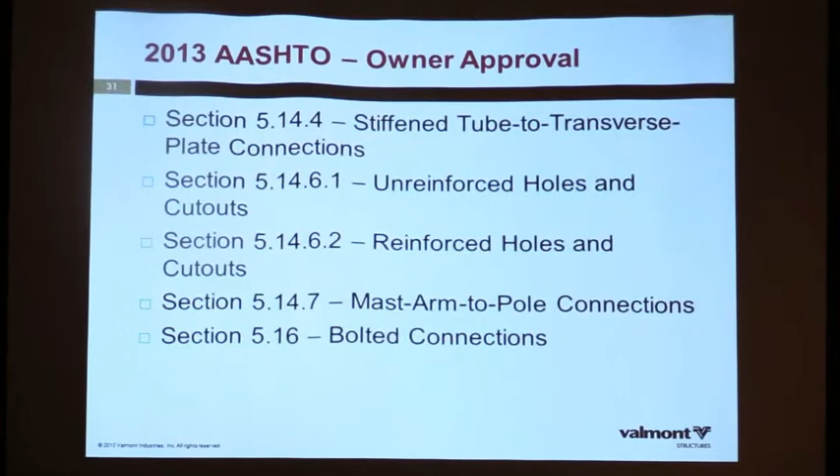The first one we didn't talk too much about, the stiffened tube to transverse plate connections. They had some requirements about not using radial stiffeners, but you can use them as long as there's sound engineering practice and owner approval.

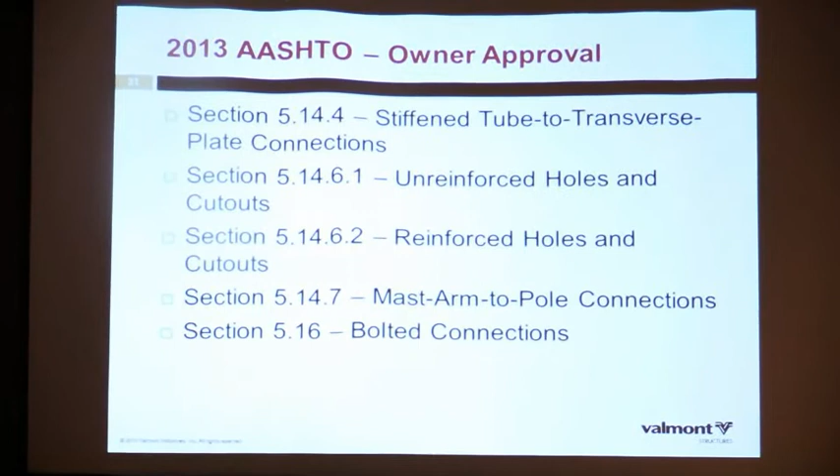The other areas would be unreinforced hole cutouts and reinforced hole cutouts, where you have different criteria that can be utilized. The mast arm to pole connections, and then the bolted connections, that's the washer, using the washer between the flanges or not. Those are the 5 areas in particular they called out, which can be deviated from as long as it's acceptable to everybody in the process.

So with that, we actually put together a simple owner approval form. If you don't have one, if you're interested in doing a project wanting to take some exceptions, to approve something else that is just good quality, you can provide a form. If you don't have something to provide us, just document it so everybody's on the same page.

With that, any comments or questions right now? We've been talking throughout, so that's great, so it might not be you, but open it up.